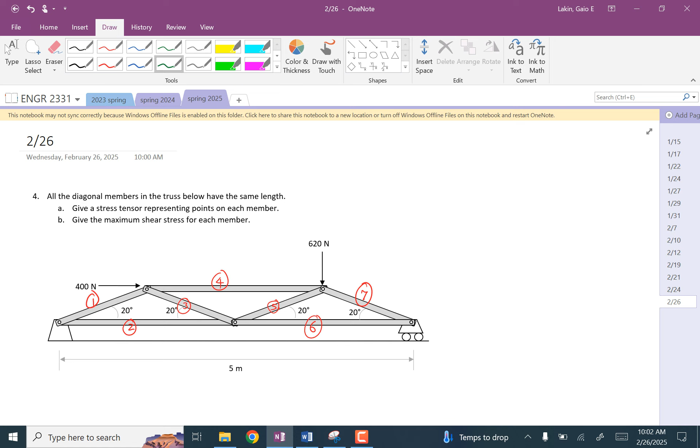So let's start numbering these. I'll call it 1, 2, 3, 4, 5, 6, 7. So we know we're going to have a system of 7 equations. And then for joints, I'll call it A, B, C, D, E.

And everything's 20 degrees. Okay, so I'm going to start out by, we don't care about the reaction between the ground and the pin at A, so I'm just going to jump right to B. So, free body diagram of B.

We have 400, F1, F3, and F4. So Newton's second law says 400, 0, plus negative 0.94 F1, negative 0.342 F1, plus F4, 0, plus 0.94 F3, negative 0.342 F3, is equal to zeros.

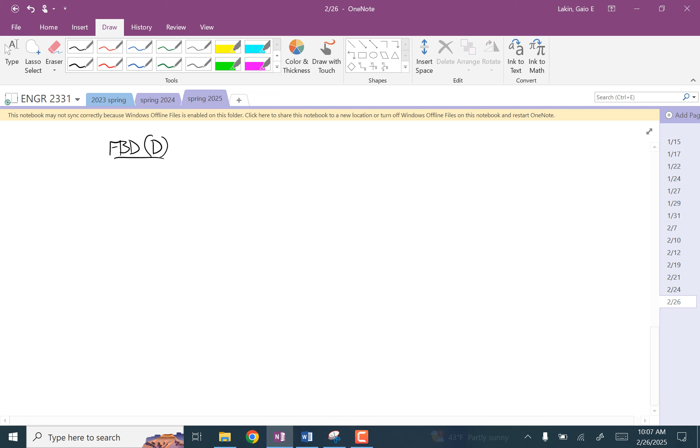So that's 4 equations. And then joint D: 4, 5, 7, and 620. Okay, so 620 down. And then I forgot already, 4. So F4, F5, and F7.

So Newton's second law, we have negative F4, 0, plus negative 0.94 F5, negative 0.342 F5, plus positive 0.94 F7, negative 0.342 F7, plus 0, negative 620 is equal to zeros.

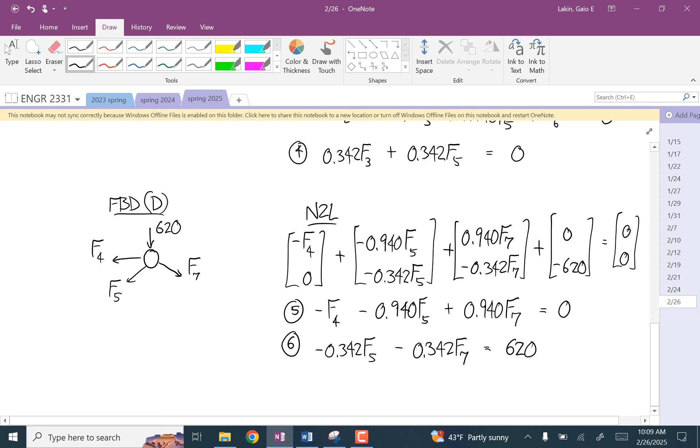So equation 5 says negative F4 minus 0.94 F5 plus 0.94 F7 is equal to 0. And equation 6 says negative 0.342 F5 minus 0.342 F7 is equal to positive 620. And we just have to do one more. That's at E.

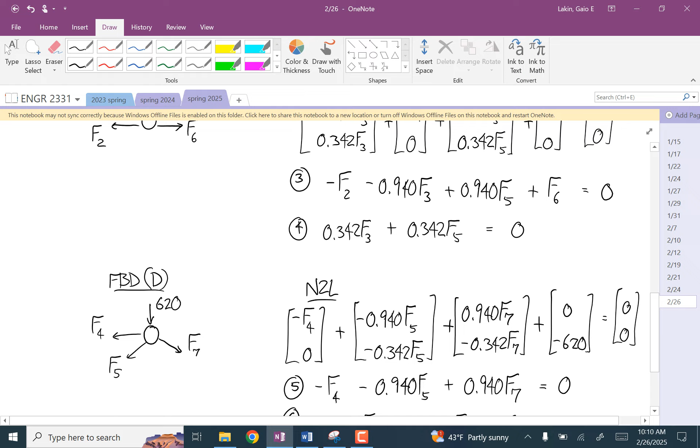So F6 is this way, horizontal. And F7 is this way. And then because it's a roller, we have a force that's perpendicular to the wheels, to the ground, pointing towards the body. So I'll call this RE.

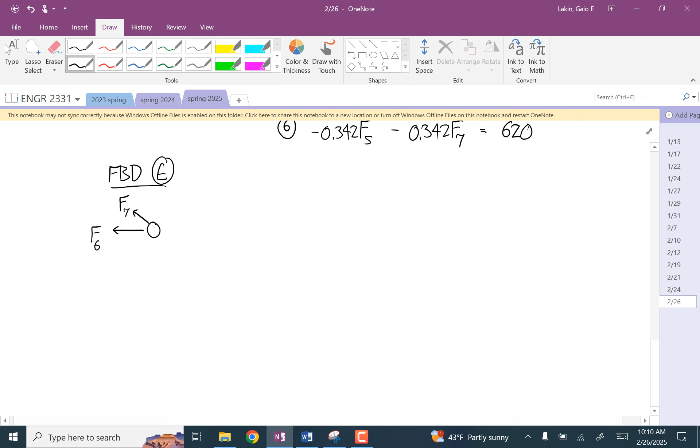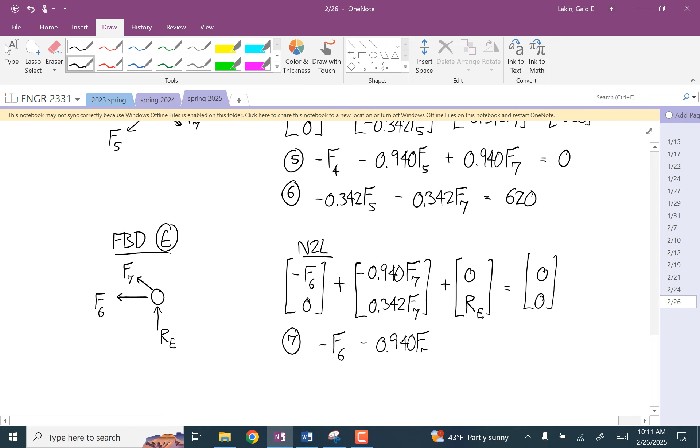And so we have negative F6, 0, plus negative 0.94 F7, positive 0.342 F7, plus 0 RE is equal to zeros. So equation 7 says negative F6 minus 0.94 F7 is equal to 0. And equation 8 says 0.342 F7 plus RE is equal to 0.

So the reason you didn't do A was because it would add 2 variables? It doesn't add 2 variables. It's still, well, yes, exactly. So it doesn't add any more members, and it introduces two new variables that we don't need to calculate anything about the members. Yeah, exactly.

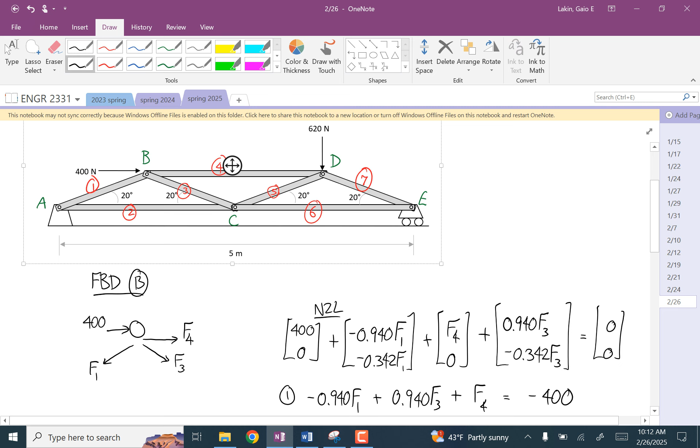Anybody want to see me go through reduced row echelon form, or y'all feel good about that?

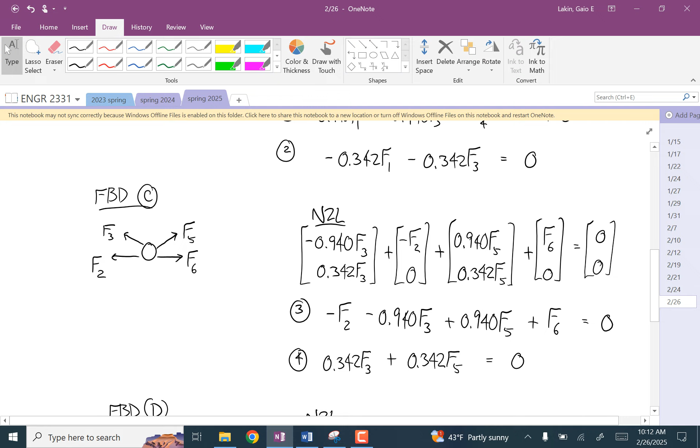How do you generally determine which joints you should be doing your free body diagrams of? Well, you can do them all, and then we would have just had 10 equations for 10 variables. The two extra equations would just be the two components of the reaction at the ground. But I guess if you have a fixed joint with the ground, you might as well leave that off. There are reasons it would be useful to calculate those reaction forces, just not for what I asked in this problem.

But the only way—if you're trying to figure out if a structure, if you can use the truss simplification or if you have to use a full method—you can use the truss simplification as long as the members don't have weights and all of the external loads act at the pins, including the reactions with the ground.

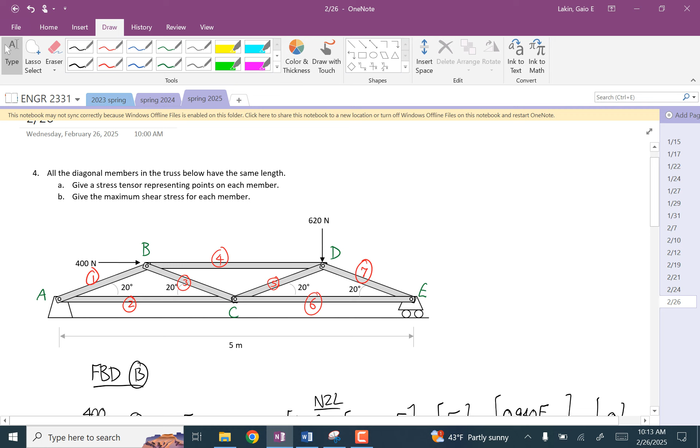So then would all these members have the same magnitude of force on the ends of them? Or would it work out to be different? I think it's all different. You know, it seems like some repeat, but the fact that you have these two different external loads acting, I think they'd be pretty much different.

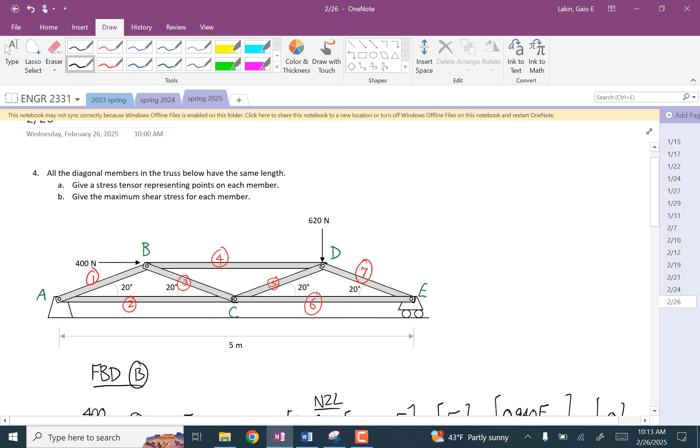And you'd see that some have really big tensions and compressions and some have pretty small ones. And that would be important, obviously, if you're choosing the material or the cross-sectional shape for these members.

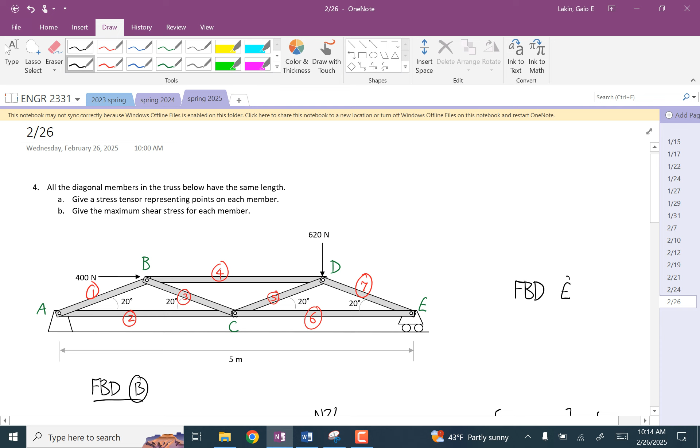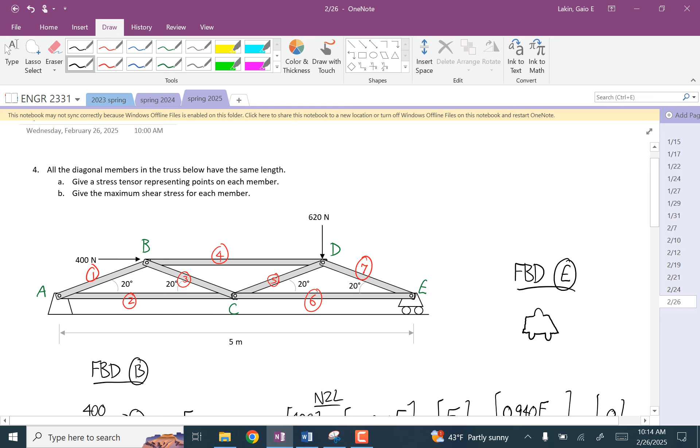Any other questions about that? What's that RE again, the variable? What is it? This, I'm kind of thinking of what I'm drawing the free body diagram of at E is I'm kind of jumbling that whole roller in as the pin. So the forces we have acting on it are... so it's just the roller. That's the force from the ground onto the rollers. Gotcha.

Thanks. Yep. So roller E, joint E. Right, gotcha. Any other homework questions you want to see?

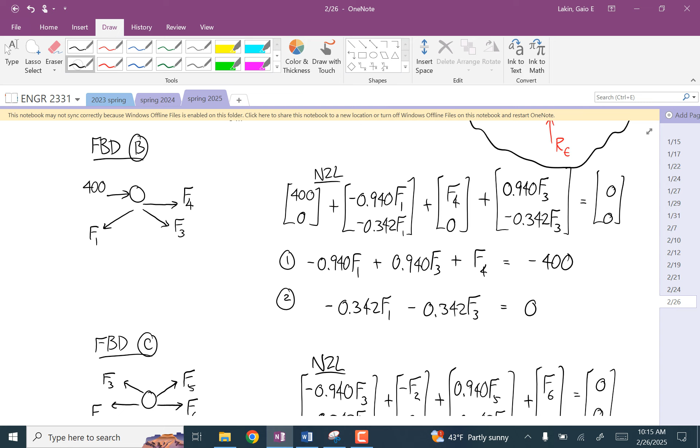Okay, so now we're going to start getting into internal loads. You guys who didn't take statics from me, did you do internal loads in your statics class? I took mine at Denver Hills, with Joan Carter. Have you seen internal loads before? Oh, it's been a while. Okay, we're going to go back over it, but it's good to know that you've seen it before. So, internal loads in beams.

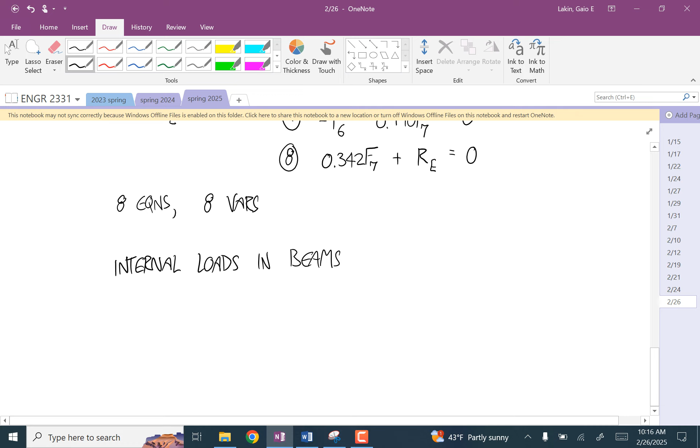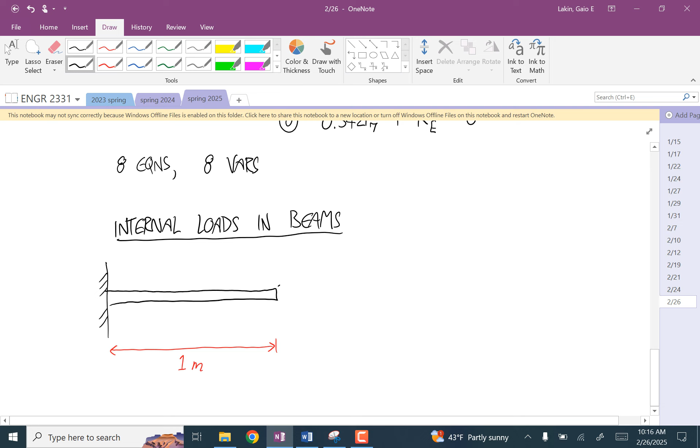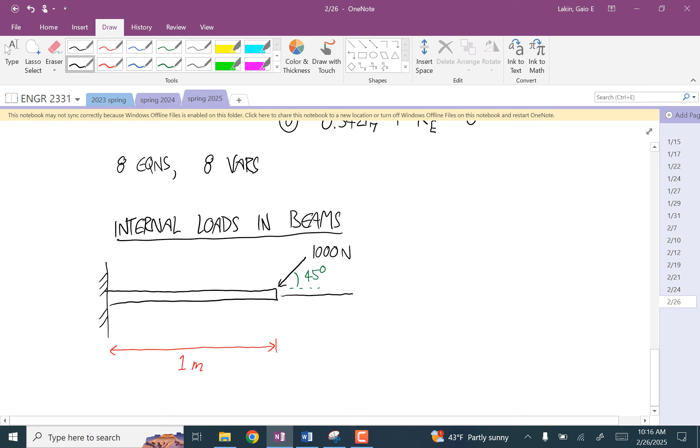So let's say that we have a cantilever beam connected to the wall over here, and let's say that this thing has a length of 1 meter, with an external load over here of 1,000, and this angle is 45 degrees. And then let's say that we have a torque applied to the end of 500 Newton meters.

Has everyone seen that notation for torque before? That's a couple, that's why it has the two heads on it, and it's saying that's a couple in the direction according to the right-hand rule this way. So that's twisting this end this way.

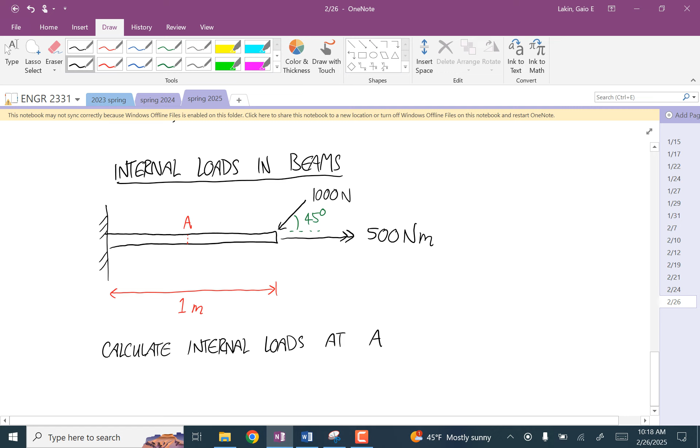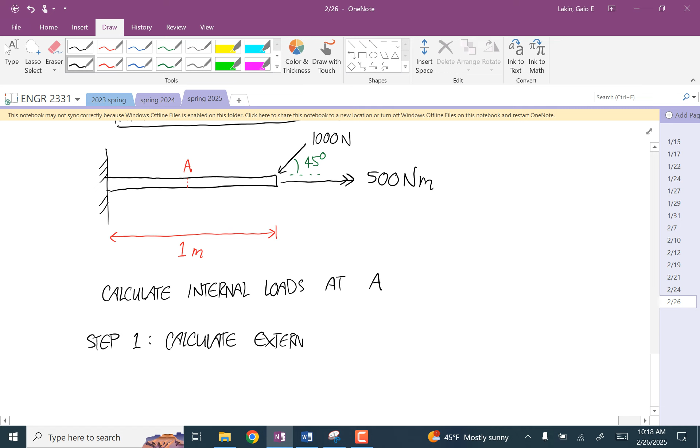And we want to calculate the internal loads at this point A. So what we're going to do is we're going to choose as our free body... well, actually I'm getting ahead of myself. First, step one, we're going to calculate the external loads. So this is just a statics problem.

So our free body diagram, we have the force here of 1,000, and we have the couple here of 500 Newton meters.

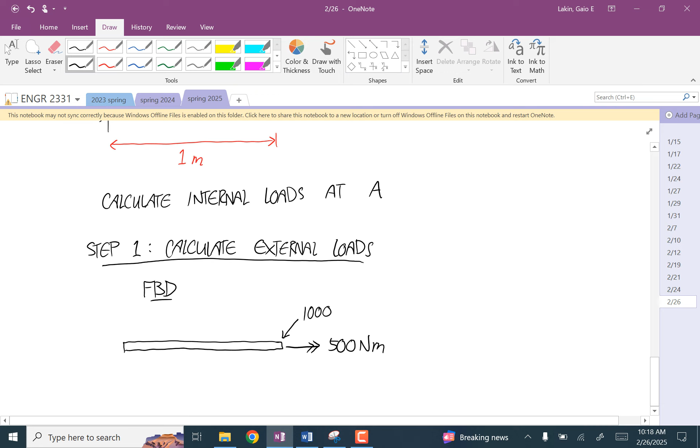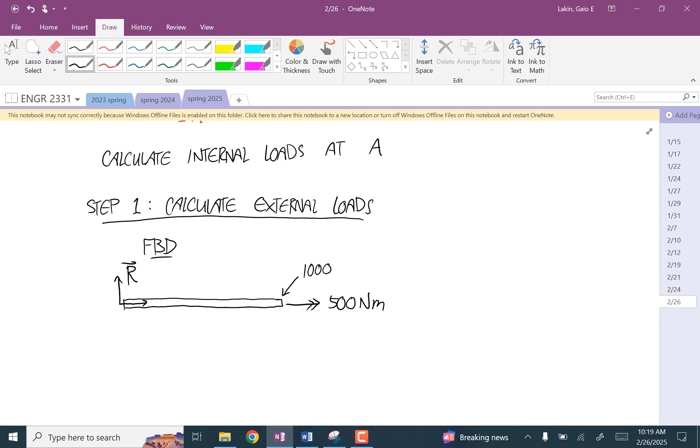And now we have to think about the joint. And this is a fixed joint. So if you remember back to statics, fixed joints apply a full vector of unknown forces and a full vector of unknown couples. So the forces we're dealing with are just in a plane like that. So I'm gonna call this R, that's the reaction force. And then in order to keep this in static equilibrium, there has to be a couple this direction to keep it from bending down, so I'm going to call this M.

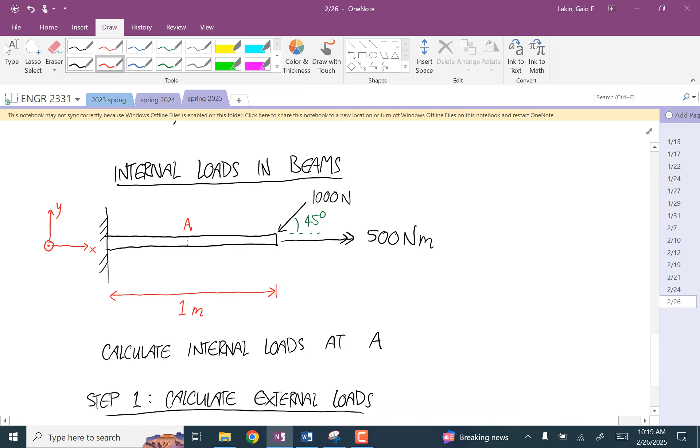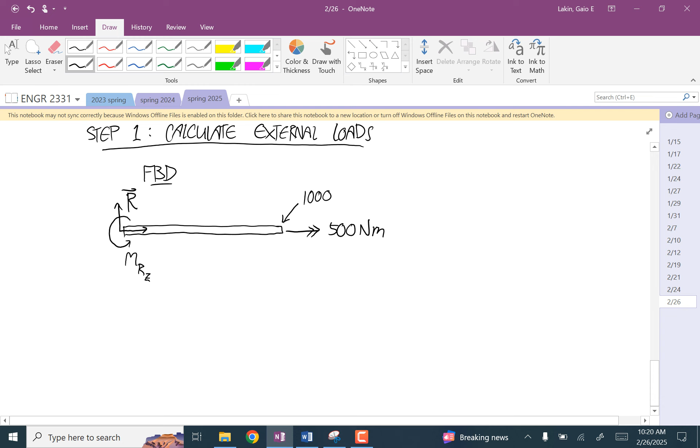So what coordinate system am I going to use? I guess I'll use X this way, Y this way, and Z towards us. So that means that this reaction couple is MR in the Z direction, and that'll keep this 1,000 Newton force from bending it down this way. And then we also need a reaction couple over here to keep it from spinning along the x-axis.

So a reaction couple is a moment? Yeah, it's right, it's a pure moment. Remember, couples are moments that don't depend on the about point. Right, so it's a moment that you just kind of add in there. So this is going to be in the x direction. Obviously it's going to be in the opposite direction, but I'm just going to make my default the positive x, and it'll just come out negative. So this is my MRX. And that's my complete free body diagram.

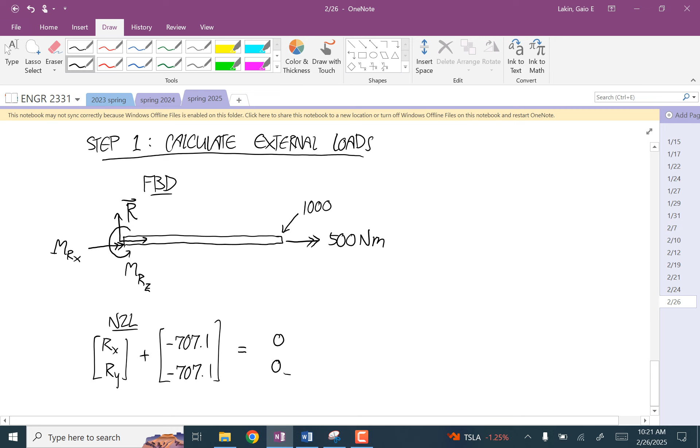And so Newton's second law says Rx, Ry plus, if I do the trigonometry on this, this is negative 707.1, negative 707.1. The 500 isn't a force, so I'm going to leave it off. And so this is equal to 0, 0. And so right away we can tell that this reaction force, doing the algebra, is 707.1, 707.1. Do you use reduced row echelon form for that one?

You could, but in this case it's uncoupled, so... I'm just messing with you. Oh, I got you. Sorry.

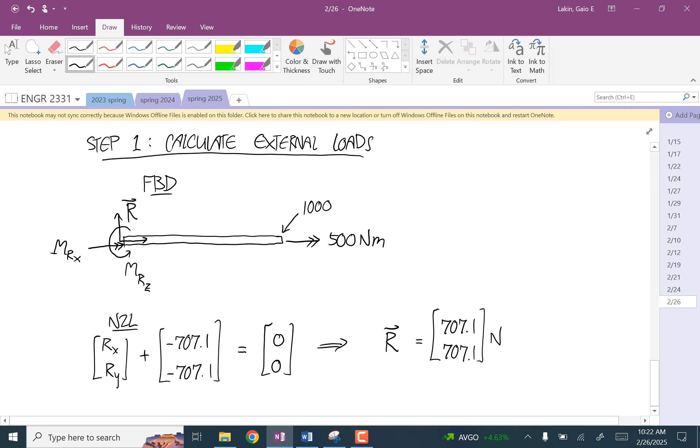Reduced row echelon form would solve that equation for you, though. I guess it's already in reduced form now that I think about it.

So now the moment equation, about Z first, since I'm used to doing Z more often. I'm going to choose as my about point this point here. That means R doesn't produce any moments, since it's acting at the about point.

The horizontal component of the 1000 doesn't produce any moments, so all we have to worry about is the vertical force. And so we have plus or minus a moment arm of 1 and a force magnitude of 707.1.

Now we have to think about the direction of that. Would that downward 707 force make this rotate clockwise or counterclockwise around that about point? Clockwise, so we want the negative.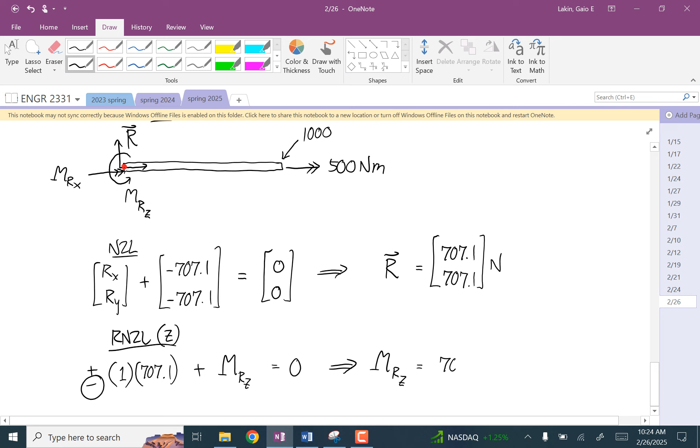And then don't forget to put in our couple MRZ. These add up to 0, and so that tells us that MRZ is equal to positive 707.1 Newton meters.

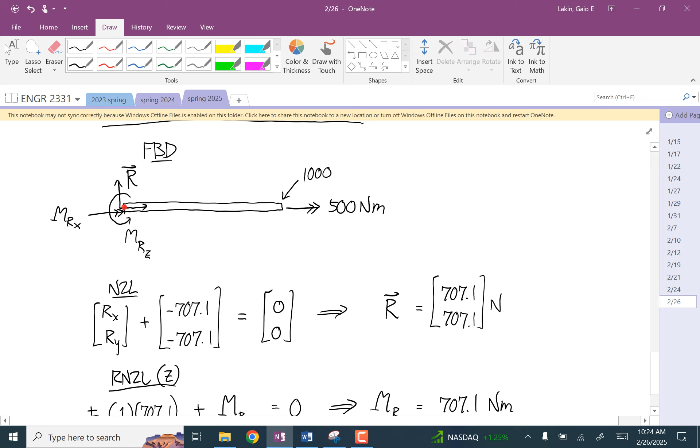Now we'll do the moments about the x-axis to deal with that torque. So we have MRX plus 500 is equal to 0. That tells us MRX is equal to negative 500 Newton meters.

Anyone have a feel for how many Newton meters of torque you can apply to a regular screwdriver? Order of magnitude - is it 1,000,000 or 1 or 0.001? Probably about 20 or 30. Oh yeah, that's right, I always say around 10, but that's the right order of magnitude. You're stronger than me, I guess. So these are very big couples compared to what we could apply.

Okay, so now we're going to go to step 2, and we're going to do our cut. We want to calculate this internal load at a specific point. If you remember back to working on internal loads, you did it using general cuts that represented all these different values, and you got your answers in terms of x. We're starting here by just making this very specific cut.

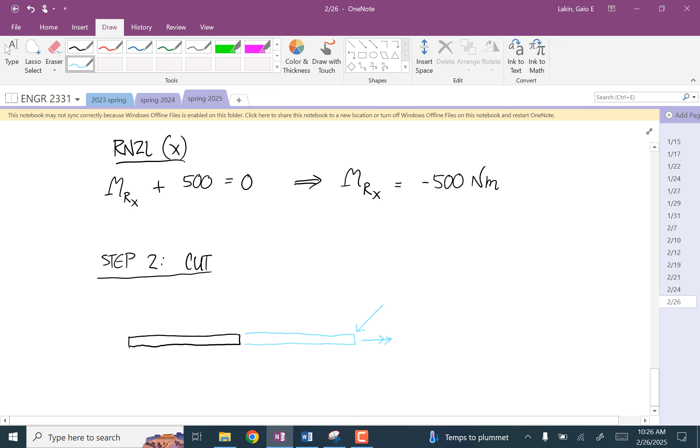So the piece that we're cutting - in light blue, I'll draw the part that we're leaving off. We're leaving off this force over here, this couple over here, we're leaving off half the beam. What we're including is a force vector, I'll just put it all as components.

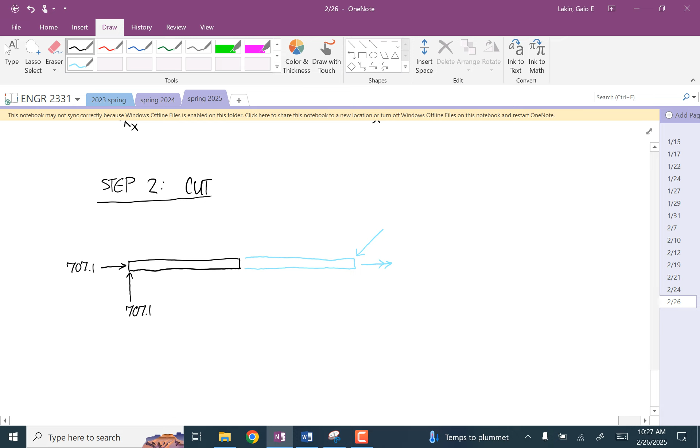So 707.1 newtons that way, a couple this way of 707.1, and then a couple this way of 500. So that's what's happening at the left end.

Now we have to think about what's happening - our free body only includes the left half of the beam, so we have to include any loads that the right half, the light blue part, applies to the black part that we're isolating. We're going to treat this as a fixed joint, so we know it's going to apply a full force vector and any couple components that we need.

I'm going to write this as an internal tension T, a downward shear force V, a bending moment M about the Z-axis, and then a torque, which I'll write as fancy T to differentiate it from the T for tension. Any questions about that?

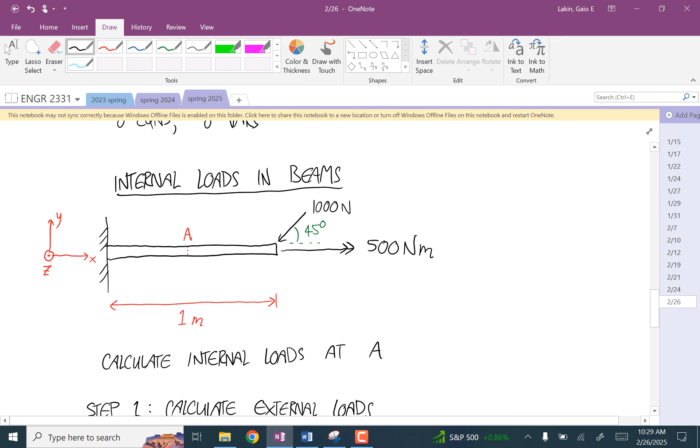Can you do that in two separate cuts, or is that the same one? This is the only cut, because I only asked for what's happening at this line A - we're not doing any general stuff yet, just for a single place. In this case there'd only be one cut, but if there was another external load, you'd have different shear on that second cut. The right side is always going to look like this, and the left side is always all the way at the end of your member, but there could be different stuff in between on different cuts.

Okay, so now we're going to apply Newton's second law. It says we have 707.1, 707.1 - those are the forces on the left - plus T, 0, plus 0, negative V is equal to zero. Solving these, T is equal to negative 707.1 and V is equal to positive 707.1.

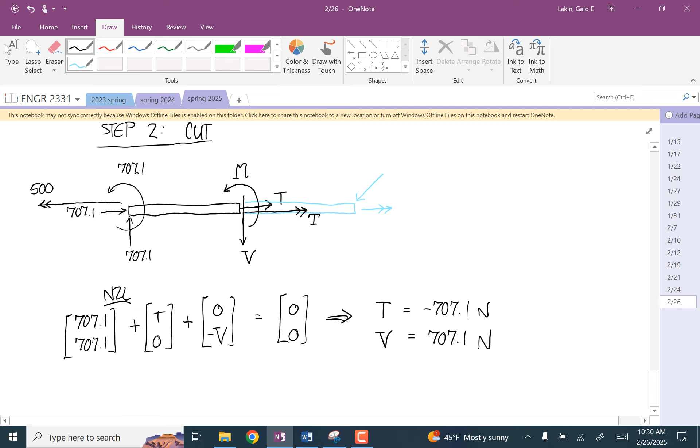Then we'll do the moment equation, and my about point is always going to be all the way at the left end. So adding up the moments, we have the couple on the left end of positive 707.1. The two forces don't produce any moment there because that's our about point. Let me write in the dimensions here - this dimension is 0.5 meters.

Okay, so now we'll add in that bending moment M, and then we'll also include the moment produced by that force V. So V has a moment arm of 0.5, with a magnitude of 707.1. It's acting down, so that downward force would make this rotate about the point clockwise, so we want the negative. And then this is equal to 0.

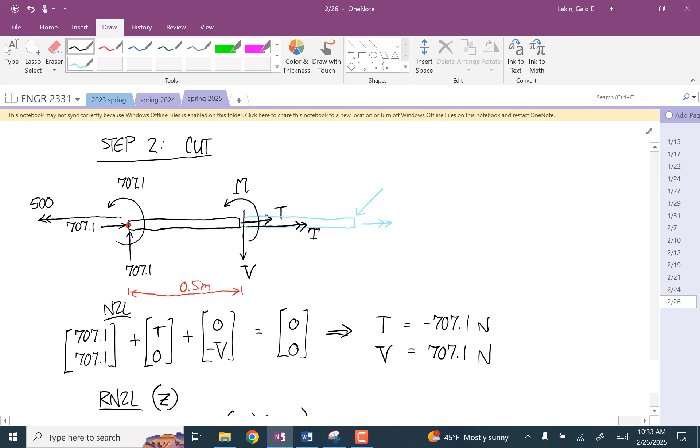Any questions about that? So this is the rotational Newton's second law about the z-axis. And then the last thing we have to do is rotational Newton's second law about the x-axis. For that one, the only moments about the x-axis are the negative 500 on the left end, and the fancy T on the right end. Those add up to 0. So we get that our internal tension—our internal, not our tension, don't make that mistake—our internal torque, T, is equal to positive 500.

Okay, any questions about that? That's for that specific point. So now what we're going to do is generalize this calculation. We're going to calculate those internal loads for every horizontal location as functions of x.

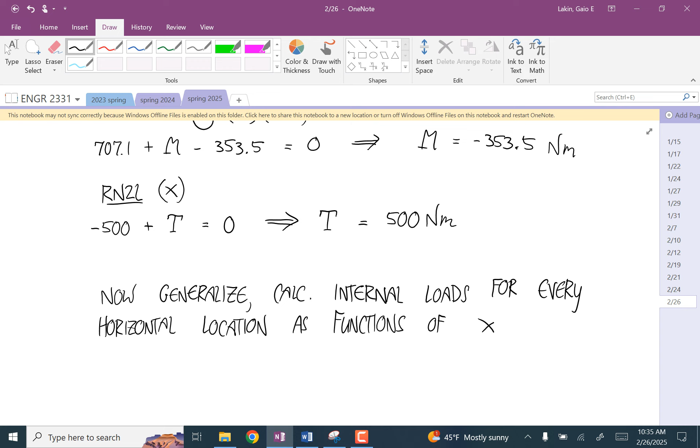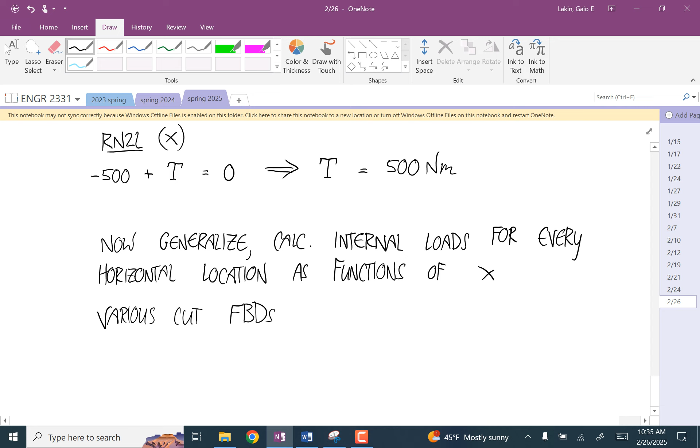Okay, so I'm going to start by just drawing a few free body diagrams. Let's say various cut free body diagrams. If the right end is 1 millimeter from the wall, then our free body diagram looks like this.

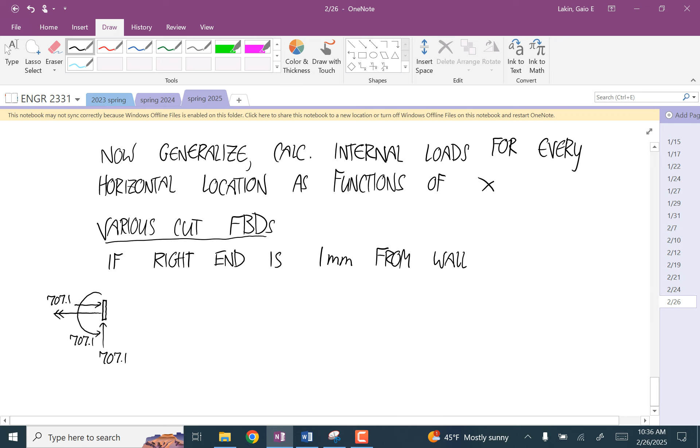We have our force of 707.1, our upward force of 707.1, our bending moment on this side—I guess I'll do it like this—this was also 707.1. And then our torque on the left end of 500. And then on the right end, we have our internal tension, our internal shear force, our internal bending moment, M, and our internal torque, fancy T.

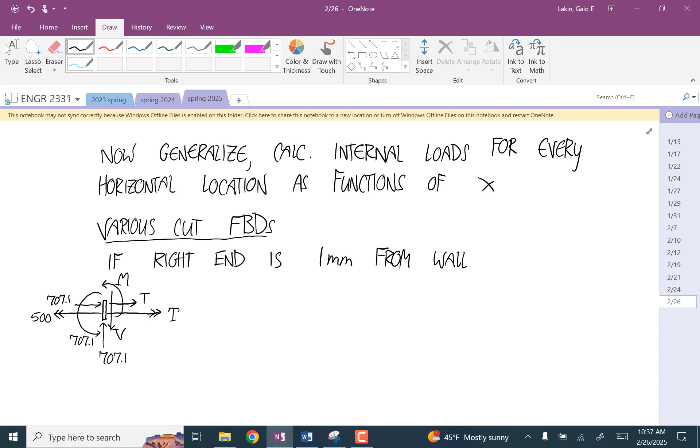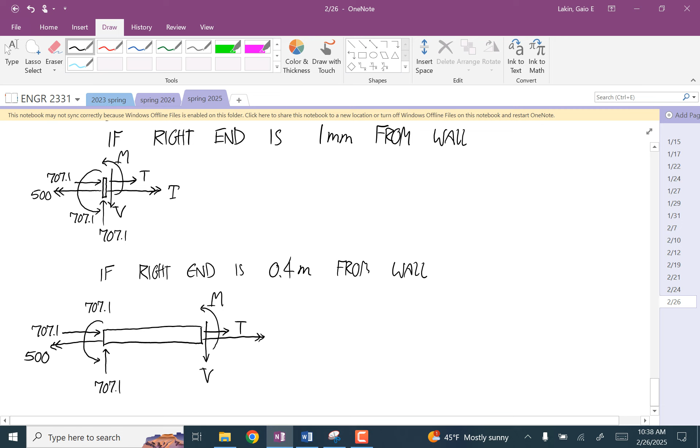If the right end is 0.4 meters from the wall, we have the horizontal force on the left of 707.1, the upward one of 707.1, the torque about the z-axis from the wall of 707.1, the torque, the couple of 500, and then over on the right end, we have the tension, the shear force, the bending moment, and the torque T. Bless you. Okay?

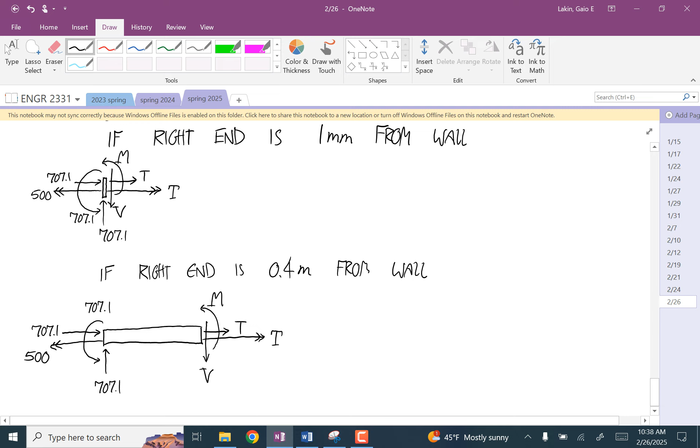And the thing to notice about these is that those free body diagrams look exactly the same. The only difference is that the length of the piece is different. So if we can represent the length of the piece as just this general value x, we can calculate both of these at the same time. Okay, let me do...

One more just to make it super boring. If the right end is 999 millimeters from the wall, then this looks like you have almost the whole beam. Over here you have the same forces.

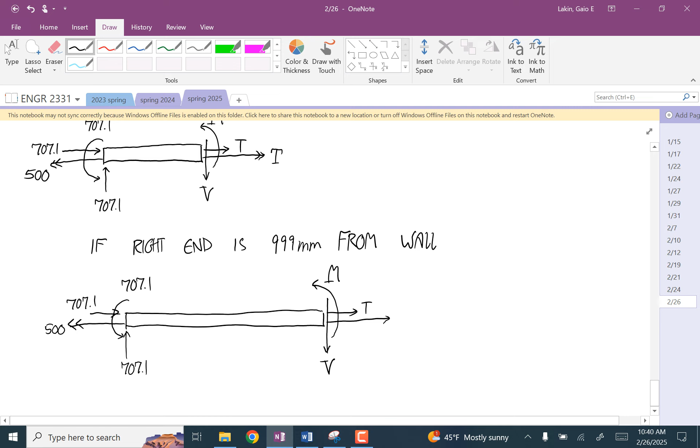You have the same moment couple about the z-axis. You have the same couple about the x-axis. And then over on the right end, you have the internal tension, internal shear force, internal bending moment, and the internal torque. And so what I'm trying to get at is no matter where you make that cut, the free body diagrams look the same. The only thing that changes is the length, okay?

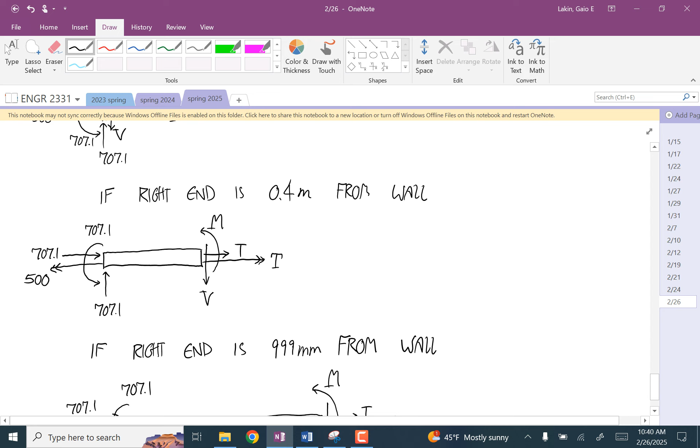So each free body diagram is exactly the same—the only thing that changes is the length.

So instead of doing infinitely many cuts, which takes a long time—I mean, you could do 100 cuts and assume that the functions are going to be smooth in between, and just do 100 actual cuts at different points—but instead, we're going to just do one cut, and we're going to represent the length by x.

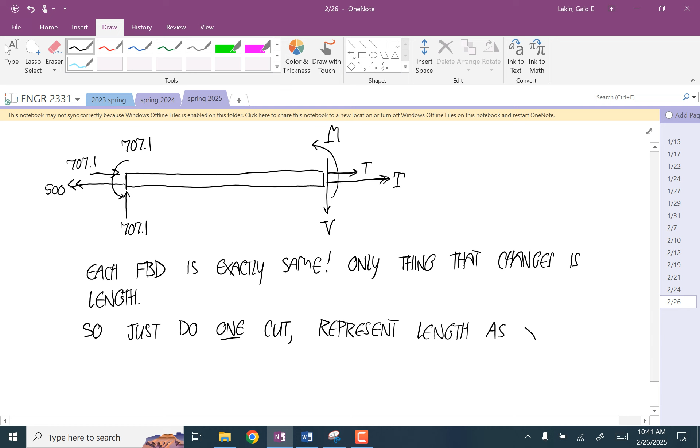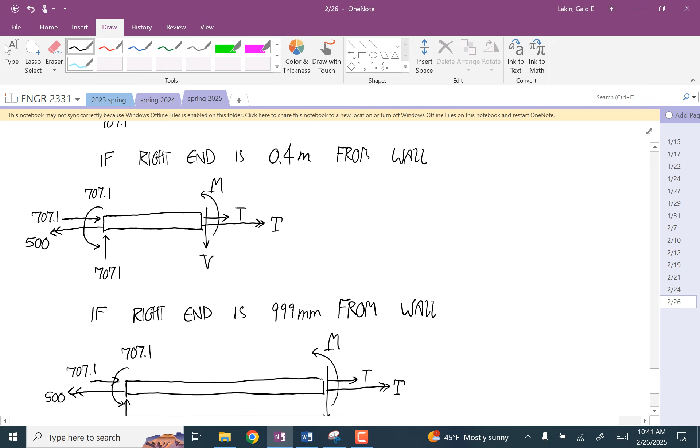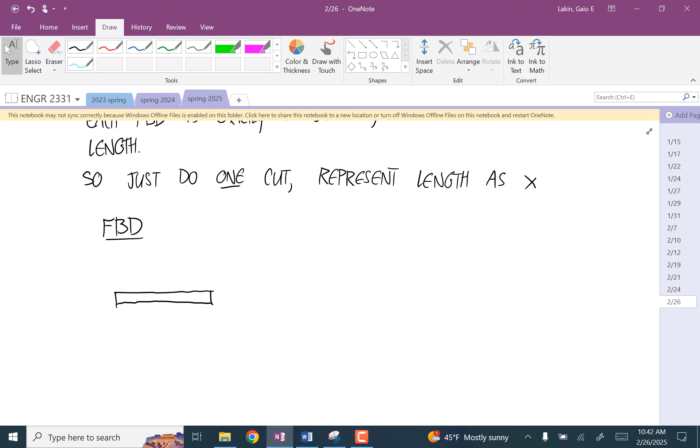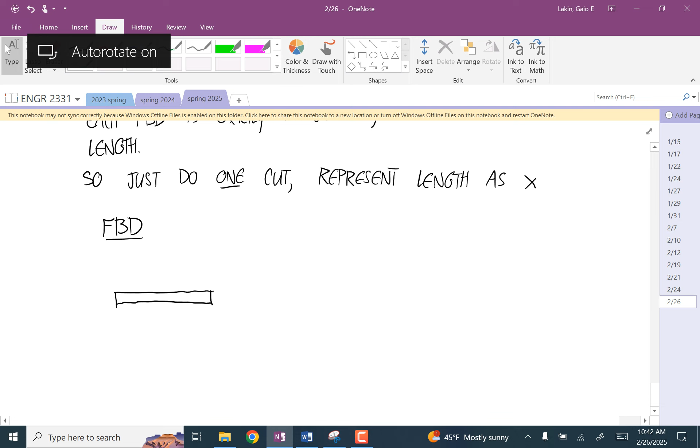We just know that this distance is x. We're going to calculate everything in terms of that x. And now everything else we put on this is the stuff that's the same for whatever cut we choose.

So we know we have the 707.1 horizontal, 707.1 vertical, the couple about the z-axis of 707.1, the couple about the x-axis to the left of 500. And then on the right end, we have our internal tension, our internal shear force, our internal bending moment. We don't know the value of that, that's M. And then our internal torque, fancy T.

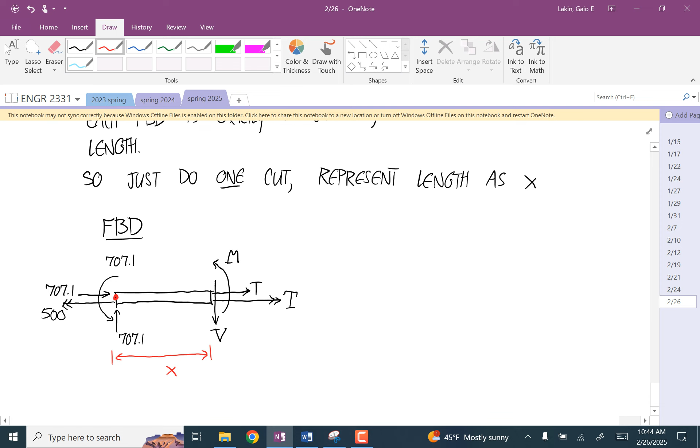And like always, we're going to calculate our moments around this point. You don't have to—in any statics problem, you can do your moments about any point you want, but this is the one that makes the math the cleanest. You can try it, or you can just trust me.

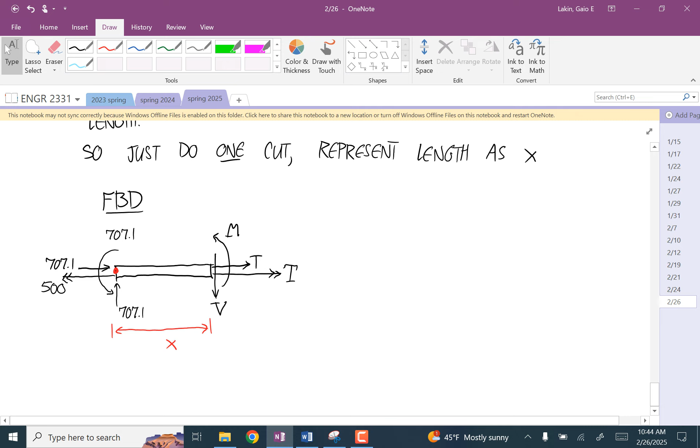And so you get that the internal tension is negative 707.1, and the internal shear force is positive 707.1. So that internal tension comes out negative—does that mean that this thing is in tension or compression? Compression, yeah. So the negative means that this is compression.

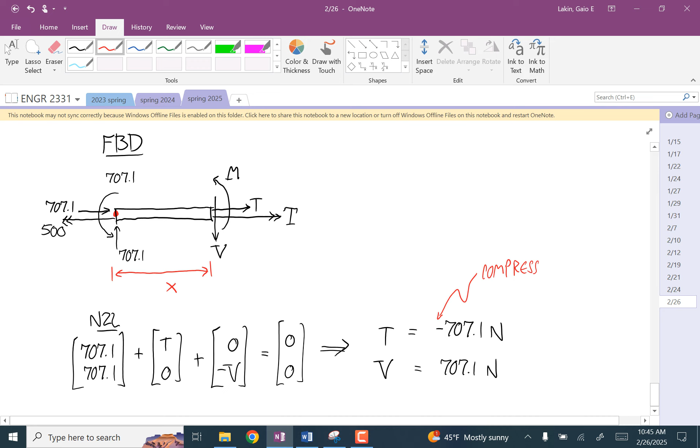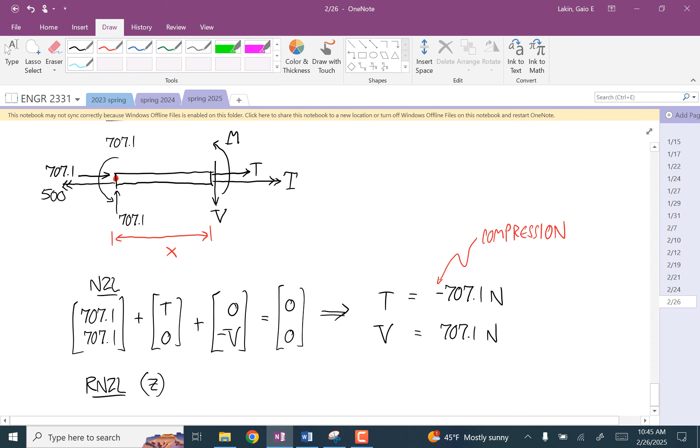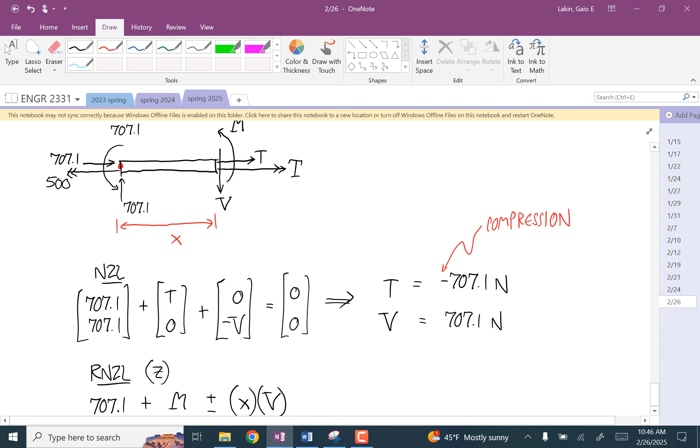And then we'll do our moment equation about the z-axis, and this is the one where in this problem we're going to see that x come into it. The forces on the left end don't produce a moment. You do have the couple of 707.1. And then you have the bending moment on the right end. And then you have the moment produced by that shear force—that's plus or minus a moment arm of x, because x is the length of this piece, times the shear force. And that's equal to 0.

If that shear force is acting in that direction, would it make it rotate clockwise or counterclockwise around the red dot? Clockwise, so we want the negative. And so now I'll simplify this. We have 707.1 plus m minus Vx is equal to 0. Now I can substitute in the V value that we know. So we have m is equal to 707.1x minus 707.1.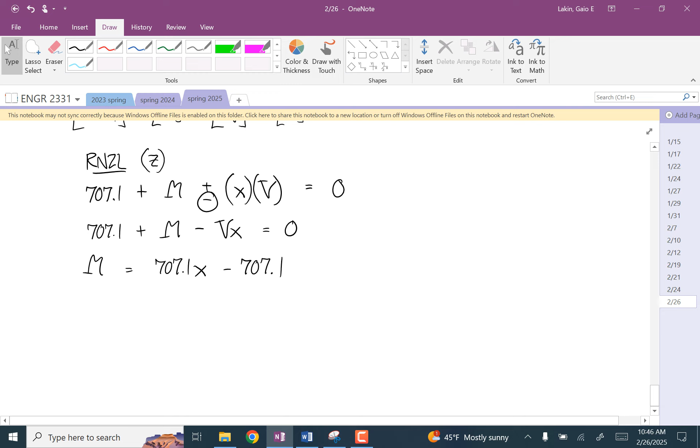Any questions about that? Oh, and we didn't do the torque yet. All right, so Newton's second law about the x-axis: we have negative 500 on the left end. Nothing else produces an x moment except that external torque T, that internal torque T. And so this tells us that that internal torque T is equal to positive 500 Newton meters.

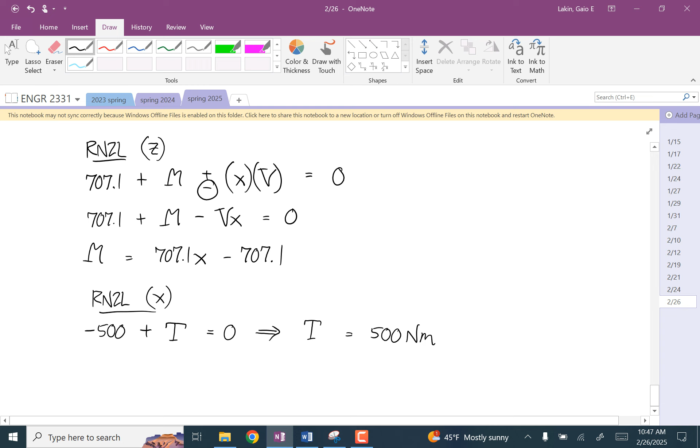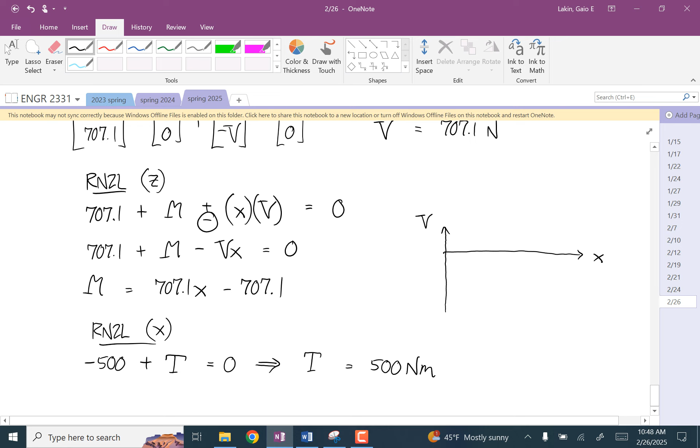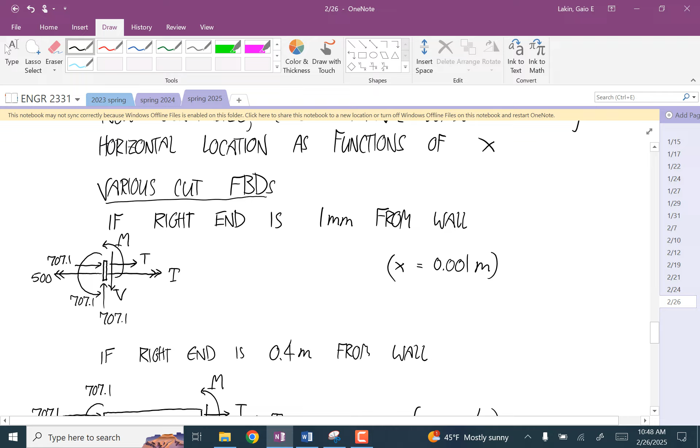Everything is constant except that bending moment. So let's think about what that means. So if we plot this bending moment as a function of x, our beam is 1 meter long. When x is equal to 0, basically what we're talking about is what is that bending moment when this cut is like an infinitesimal sliver.

What's that bending moment? X is equal to 0 in that case. So we have, at that point—we're graphing bending moment versus x. Plug in x equals 0, you get negative 707.1. It's a linear function. Plug in 1 for x, and you get 0. So that bending moment at the left end is negative 707.1, and it gets smaller and smaller until it's 0 at the right end.

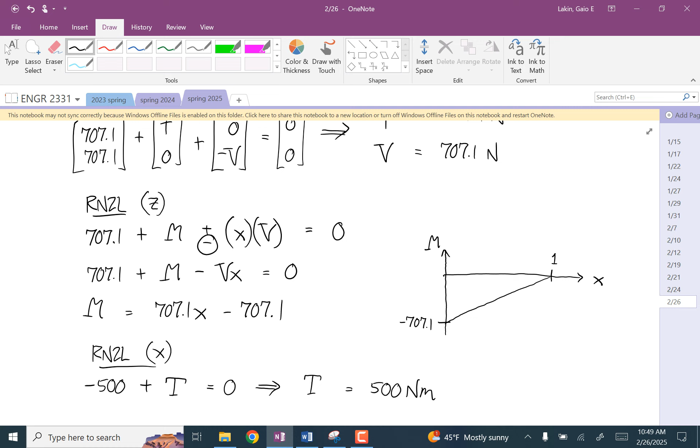None of the other ones are worth graphing because they're all just constant. Any questions about that? Okay, so the key thing here is...

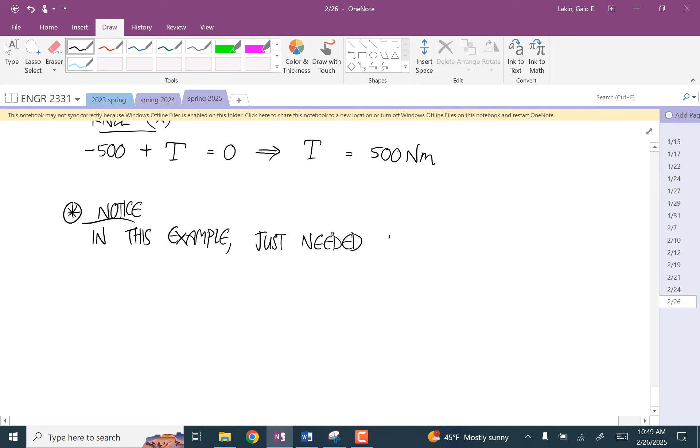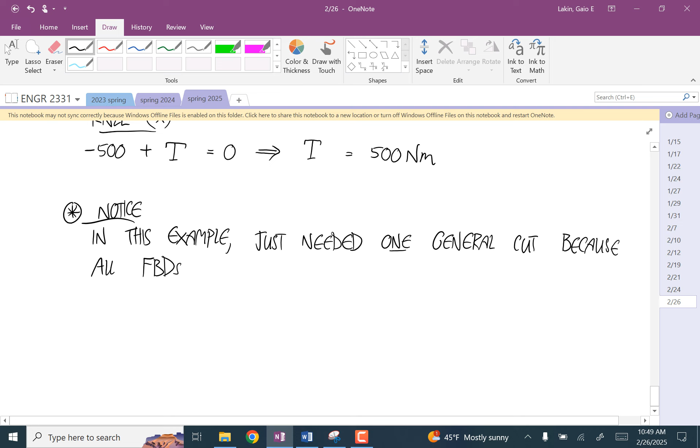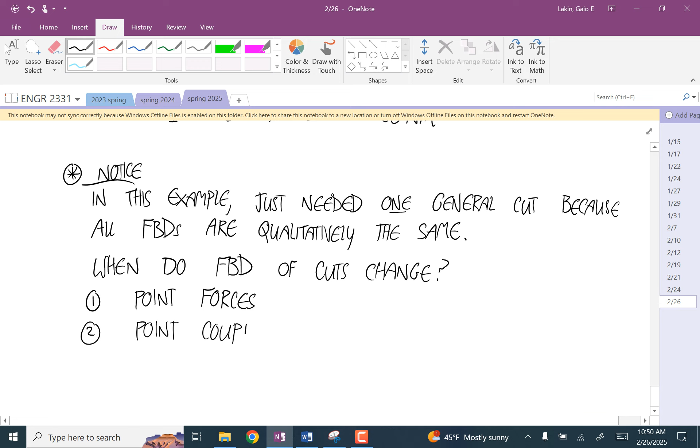In this example, we just needed one general cut, because all the free body diagrams are the same, qualitatively the same. When do you need more than one cut? When do the free body diagrams of the cuts change? Well, that happens anytime you have point forces, point couples, or anywhere that a distributed load function changes.

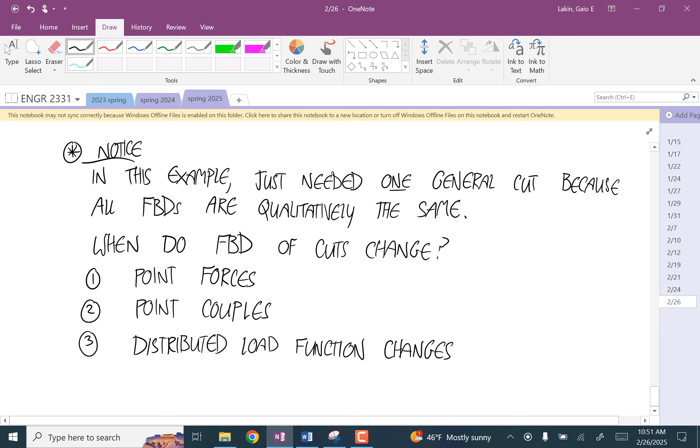Okay, so next time we'll get into cases where we have multiple cuts and we'll start talking about distributed loads. Does anyone happen to remember the checks on these things? The derivative checks? Yeah, the derivative of m is v. So dm/dx is equal to v. And then do you remember the other one related to distributed loads? So if you have a distributed load function q of x, negative dv/dx is equal to the function q. Remember that we'll get to those things eventually.

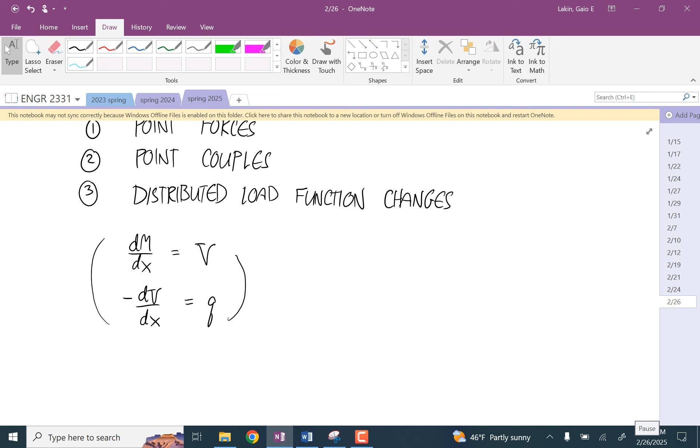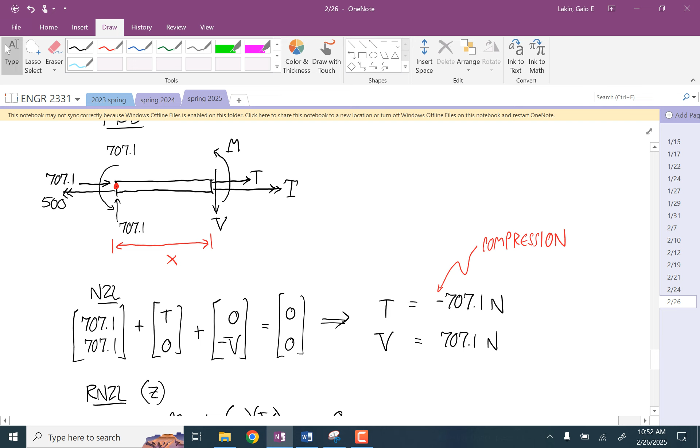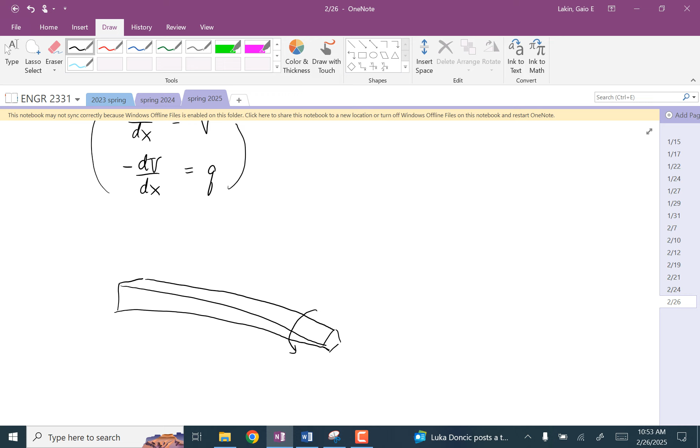Kind of random question. I don't understand how torque can exist in 2D. Well, okay, everything's happening in 2D except that torque, really—it's not really in 2D. It's like this, twisting, yeah, it's really like a beam, twisting around like that. I don't know. Okay, so we're representing it. I'm just drawing it in 2D, but that twist is happening in a different plane.